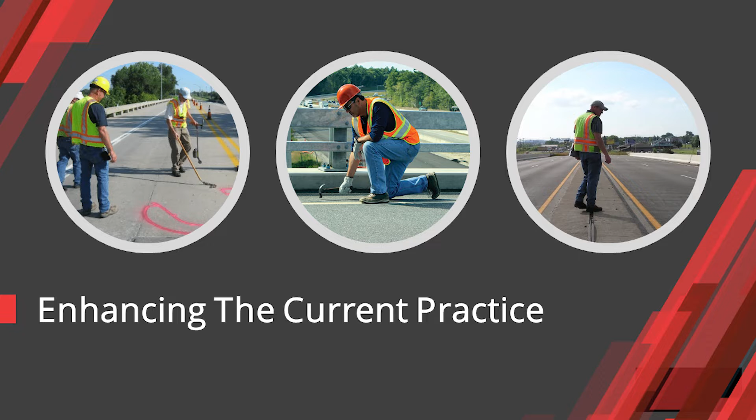So quickly going through enhancing the current practice of, for example, visual inspection, this is done through this truck that many of you saw parked outside. This is what we've called our high-speed inspection truck. Many of you have seen it, and we have gone over the equipment, so I'm going to make the rest of the presentation more about the results than the equipment. But to quickly go over what we have on board this high-speed inspection truck to facilitate the visual inspection, we are capable of conducting the inspections and data collections at speeds of 40 miles per hour or higher if need be.

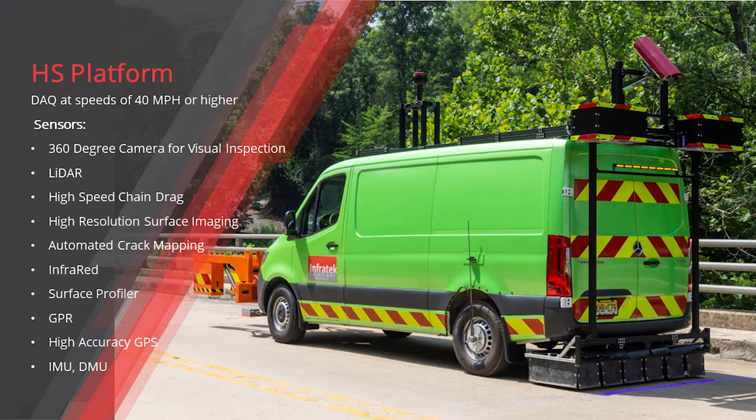We have a 360-degree camera that you see on top of the truck, and since this picture was taken, we moved that camera toward the front of the vehicle, and it gives the inspectors this immersive view of the structure as the inspector is walking the structure and looking around. We've got LiDAR for measurements, high-speed chain drag that we're going to talk about, surface imaging and crack mapping, infrared for thermography if there are favorable weather conditions, surface profilers, GPR, and some other tools to make sure that we know the local coordinate system of the bridge and where the data is being collected.

So if you want to see a quick sample of how the data is collected, it is collected like this, and we are done. This is a local bridge in north New Jersey. The bridge is around 150 feet long and 32 feet wide. But as you saw, that is all it took for us to collect the data that we required for the purpose of our visual inspection. And that enables the inspectors to start their inspection job from the safety and comfort of their computer. Now, this is a small bridge. Imagine the possibilities for a lot bigger bridges, interstate bridges, and the like.

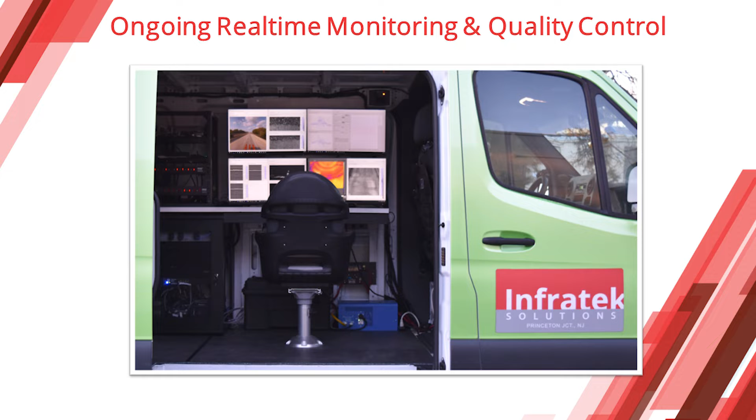So as we discussed, real-time monitoring and quality control is very important, because whatever we collect and give to the inspector, we want to make sure it is in the best condition it can be. So we have software quality control in place that does everything in real time, and we have operators who, while the data is being collected, are sitting there monitoring the data coming in, so that if we see problems, we can take care of them in the field, or if that is not possible, we will mark the data so that it wouldn't pollute the final results.

Now, when it comes to the delivery, we have an online portal that the users would be able to customize to their own liking. But we are going to go over some of the results that are mostly videos. We were talking about giving the inspectors the option and capability to walk the bridge.

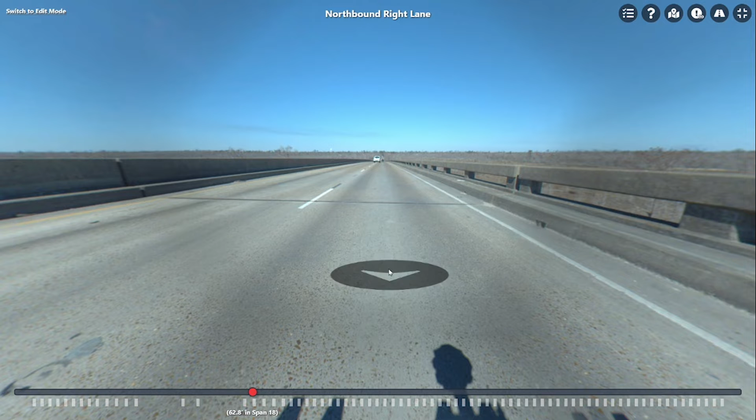This is a bridge actually in Louisiana. It is a 1.2 mile long bridge, 4-lane, that we did for their complex bridge design team. One of the functionalities they were really looking for was, because they couldn't really close the bridge to traffic because of so many conditions and schools being nearby and things like that, they wanted to have this ability to walk around the bridge and look at things. So literally we facilitated that for them.

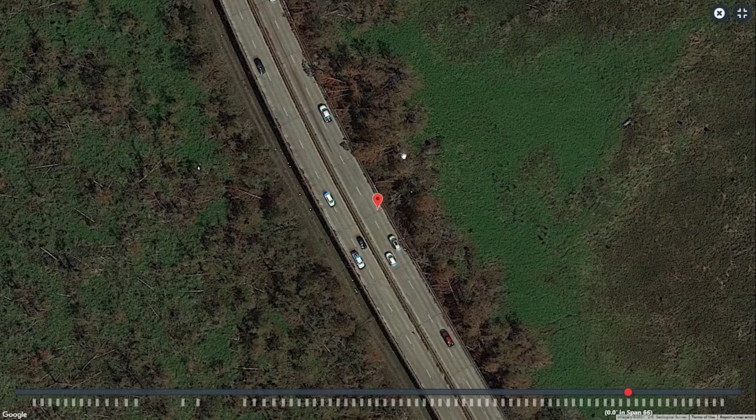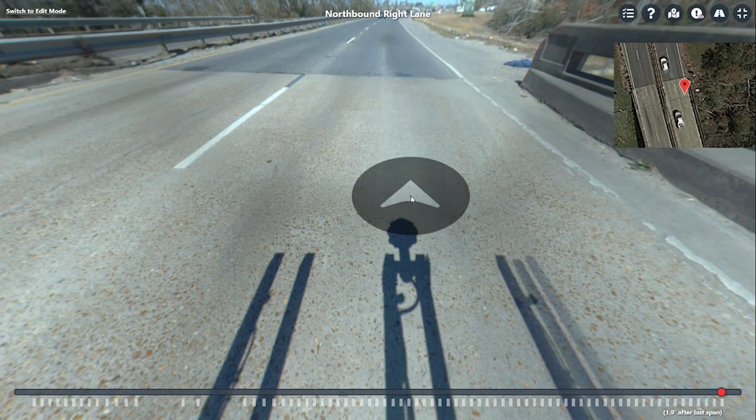Now we can do our visual inspection through many of these sensors, and then with some other tools, for example, integrating with Google Maps, we would be able to give you some other view into the surrounding and other things that inspectors use. Google Satellite is one of the things that we use quite often, and that is pretty much integrated into the system too. You wouldn't need to switch between this system and Google Maps to, for example, check out the surrounding.

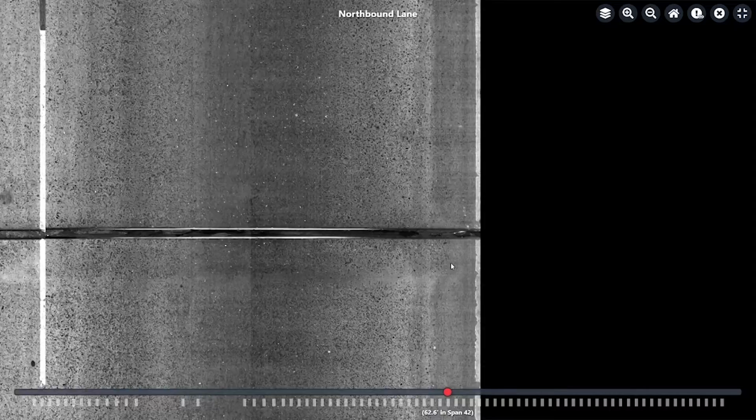But the other thing that we've done is, by this system, we are giving the inspectors what I would like to call Superman vision as well, because not only would the inspectors be able to look around, which sometimes wasn't really possible, but we would be able to help them move quickly from location to location. For example, right now, as you can see, we are moving from span to span, and we are looking down. But at the same time, if you would like to zoom in a little bit more, to use something like a magnifying glass to check that, that would be possible right from the inspection portal as well.

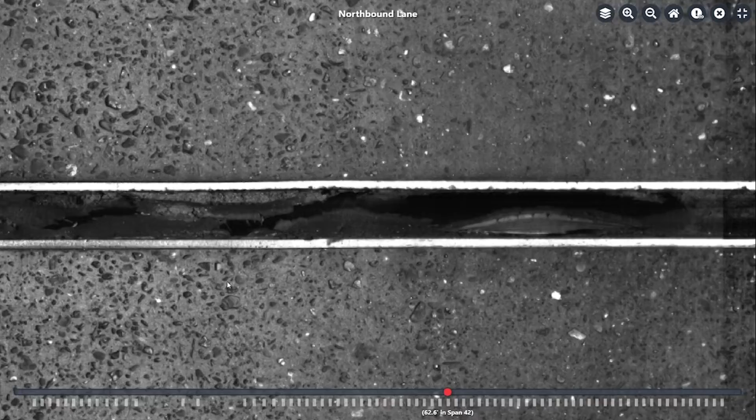Or even if you would like to see subsurface information, that is why I would like to call it Superman vision, you would be able to go to the subsurface and see what is happening below the surface as well. This was, for example, one example of the joint inspection, that as you saw, we would be able to zoom really into the joint and check out, for example, the integrity of the joint seal.

We talked about crack mapping. So we have high resolution cameras taking pictures from the surface, and then we have trained the AI to detect the cracks. And based on the criteria and the width categories that the user defines, the system paints over those cracks for you, calculates the total length of those cracks on the bridge, and then reports everything back to you. We've got density maps based on those calculations.

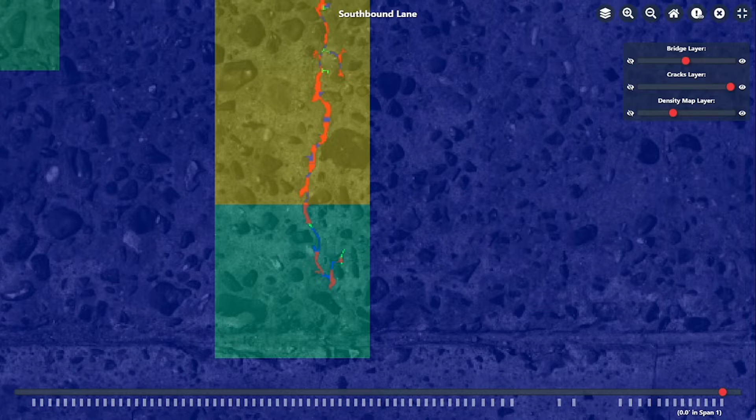You can turn it on and off, and then see where you have, for example, higher density of the cracks, lower density of the cracks, and remember that we've got chain drag data, so you will be able to see, where you see a lot of cracking, what is going on below it. Are we having, for example, shallow delamination in that area or not? Again, that is totally possible, and that is something that I would say contributes to that Superman vision that we talked about.

You want to have a high view into your bridge deck and see what the status of the cracking is. So you're looking at the density map, and then you see a red spot. That means an area with a lot of cracks, or bigger cracks, compared to all other areas on your bridge. And that could be literally your focus area for something really quick that you want to do with that bridge. Again, that is all possible from here.

But the other thing that we made available is the power of customization. Because we know that bridge to bridge, inspector to inspector, program to program, there are so many differences. Again, Ben, back to your question regarding time pressure, if there are things that we will be able to implement here based on a specific owner of, for example, different districts, we would be able to implement them here as well, with the idea of increasing the efficiency of the work and removing that time pressure that we're talking about.

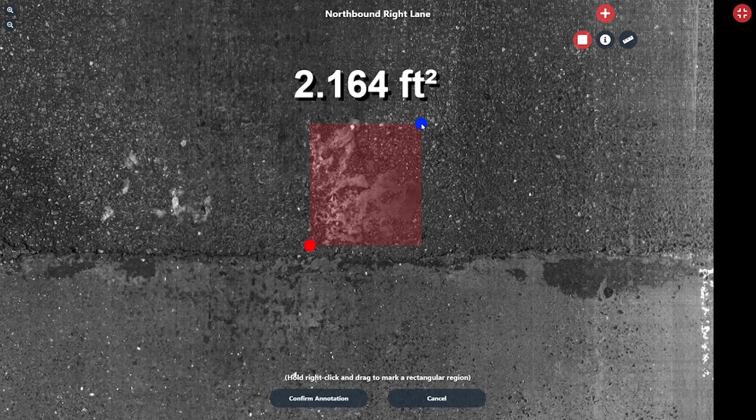We want to do measurements. That is something that we all would love to do in the field, but most of the time it is not possible. But it is pretty easily done from the system. If it's linear measurement, if it's the perimeter of a feature, if it is the square footage of a feature, those can all be done straight from the inspection portal. Now, when it comes to seeing something and marking it, again, we are training another AI engine to start detecting features.

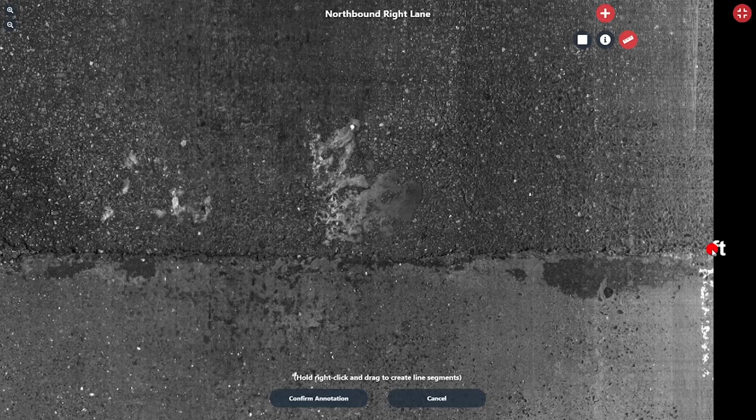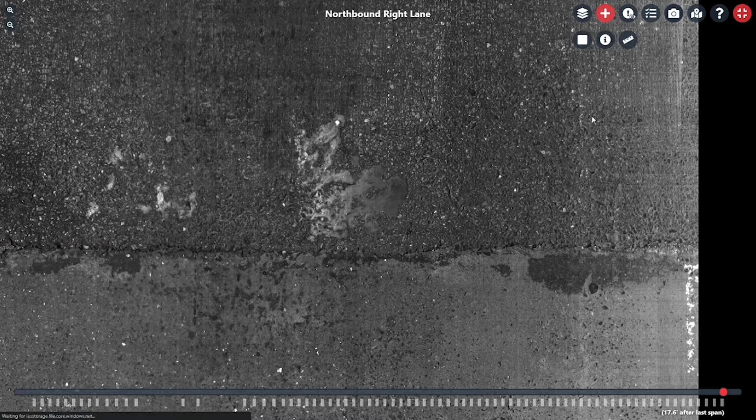Right now, that engine is trained for cracks, so if we see cracks anywhere, we would be able to actually do it. But now we've started to train that engine for spalls as well. So when the inspection work begins, for example by state inspectors, when the system is activated, it comes with some, I would say, picked problems.

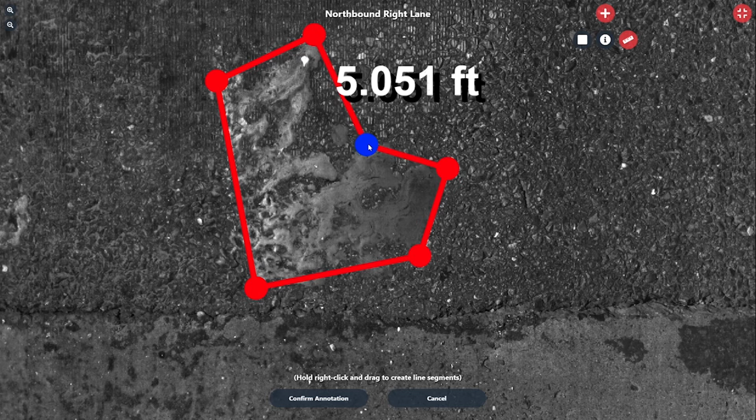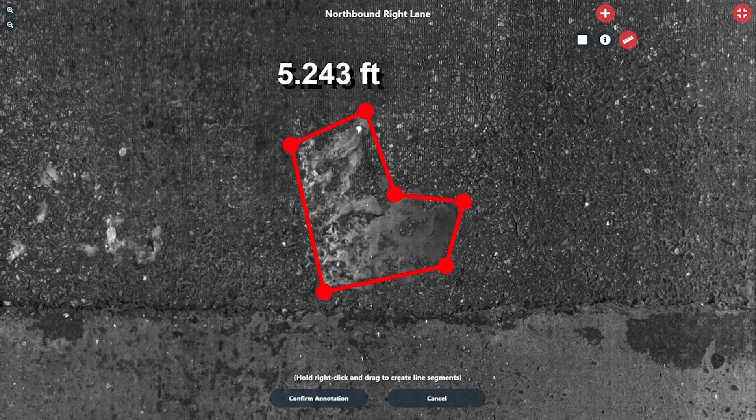For example, right now we are working on spalls, so the system would find the spalls and mark them for you. And then it would automatically go ahead and, for example, fill out the NBE or NBI form based on the problem that it found. So we already know the location of the defect. The system already knows it, so it's going to jot down the location for you. It's going to take a picture and automatically attach it for you.

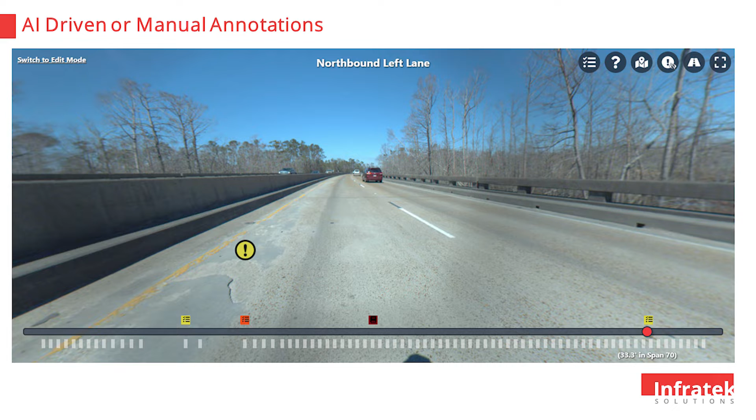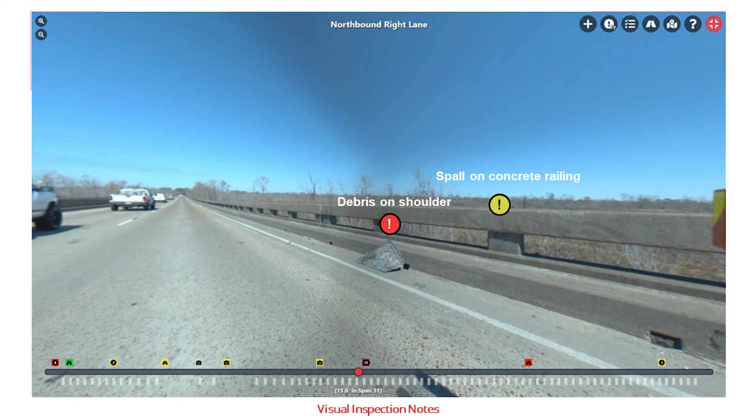Some other screenshots from the work that we did for Louisiana DOT. And this is a quick look into how the process is done if an inspector wants to do it manually. So you see the problem, you would like to annotate it and log it for use or for being part of your inspection report.

The system is going to ask you whether it is something personal or you want to formalize it and assign, in this case, an element detail to it. And then the user goes ahead and chooses the element level detail. And based on where the location of the defect is, the form is going to change dynamically. You give the information, and then it logs it for you with everything you provide to the system.

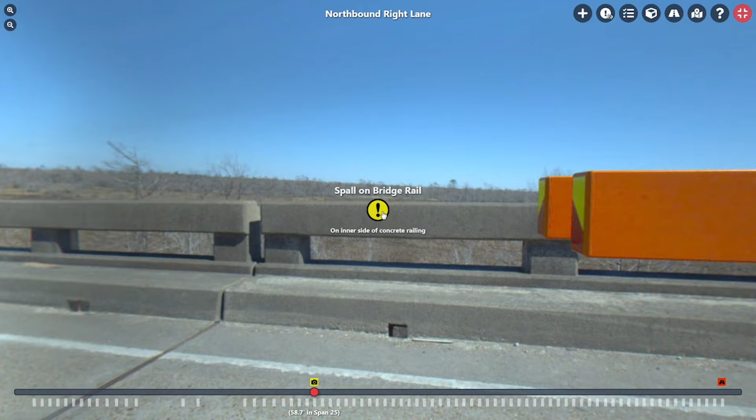Now, there is this connection between the forms as well as the defects too. You see the published form. You see, for example, there is this area of spalling on the deck with condition state 2. You want to check it out right there from the form. You click on that area, it takes you back to where the picture was taken from. Or if you see an annotated location showing up on your inspection form, you click on it and it takes you to where the form is.

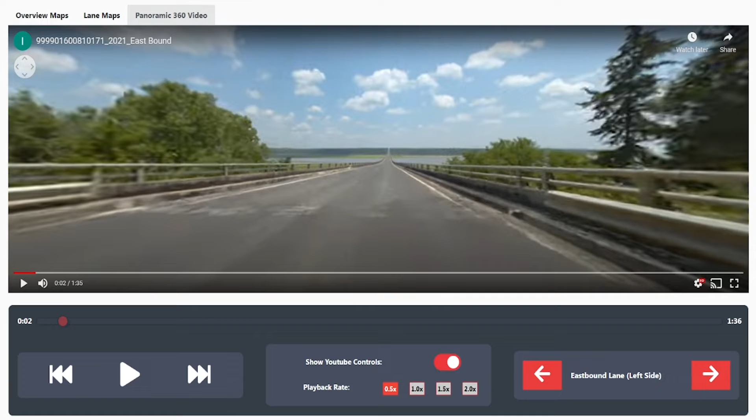And with the forms, we are currently streamlining the process so that you can literally file and transmit the inspection file to FHWA as well. And another feature that many of our users and owners we are working with asked for, and we added to the portal, is to just see a video as if we were driving the deck. So we added that as well for use by inspectors.

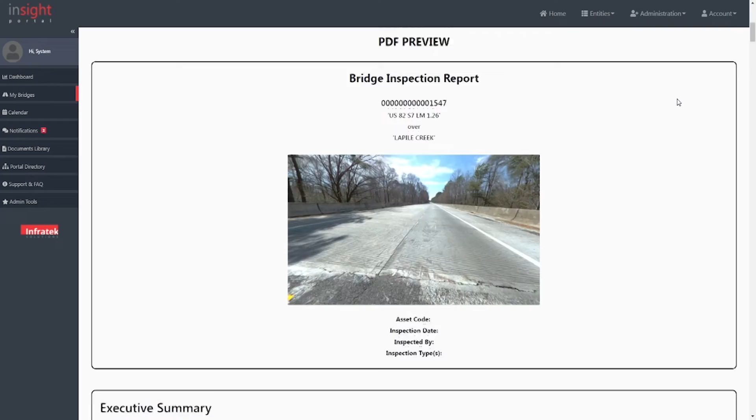This is a dynamic form builder that we already have there. So based on the different type of inspection, you can dynamically add in what you will need. If the system has already picked them, it's going to be pre-populated. If you pick them using the system, it's going to be automatically populated for you as well. As we just discussed, it already has much of the information to log the problem for you. We already covered the bidirectional connection. It is editable and collaborative. We have built in task assignment, management of tasks, and communication between different users of the form as well.

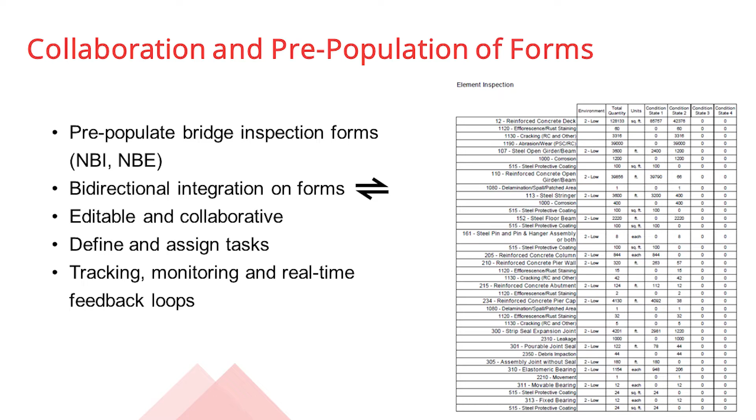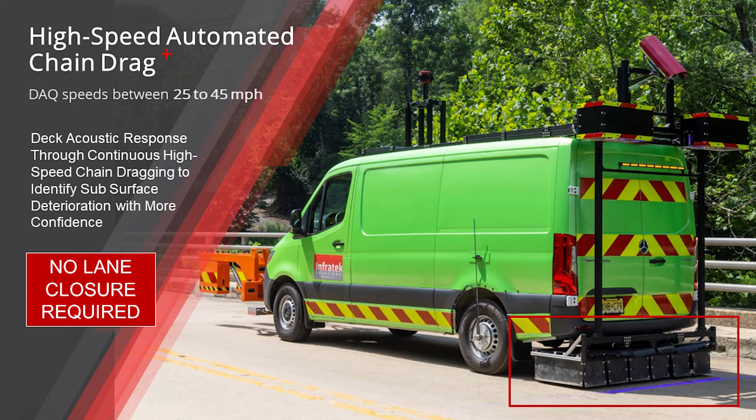Now going into chain drag, it is this part of the system that is within the footprint of the vehicle. It is here. Again, we can go at any speed. We can get started from even walking speed, but at 40, 45 miles per hour, the system works very well. The good thing about this system is that we wouldn't need any kind of lane closure, and the results are a lot better than the chain drag that we all do, because most of the time we are relying on our ears, where a lot of background noise is going to prevent us from hearing the defect.

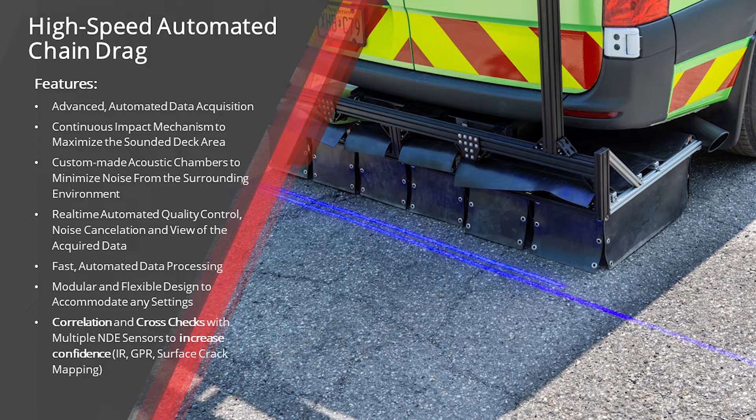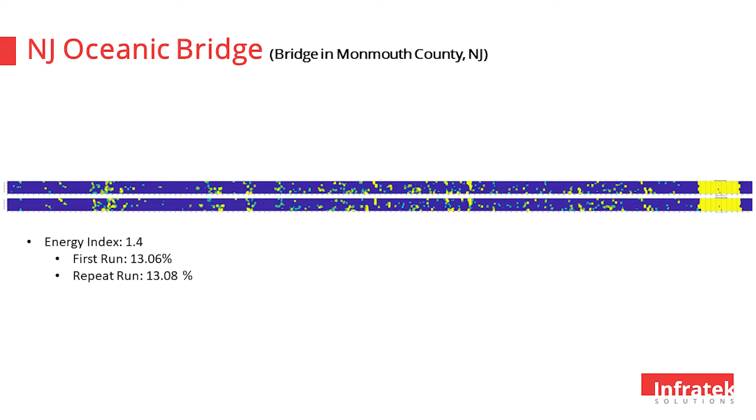It is highly repeatable, so this is another project for a county in New Jersey. As you can see, it was a movable bridge. We did chain dragging at 2 different times, 4 weeks apart. Top and bottom are 2 different results from those 2 different days. The patterns are the same, and the delaminated area for one is 13.06%, for the other one is 13.08%.

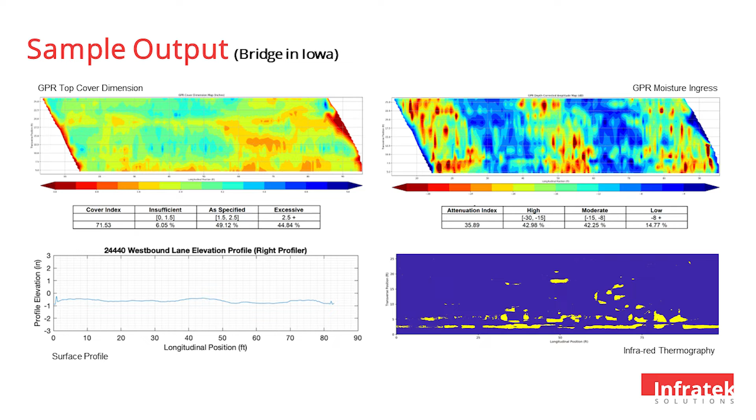And some of the other data coming out of the high-speed system actually give that Superman vision to the inspector to see what is really going on below the surface. Now, if we go into the area of multifaceted NDE, or going back to the earlier conversation of doing our high-speed test and then doing more in-depth test, we have another tool in the toolbox that we call our high-definition system that, again, many of you saw parked outside.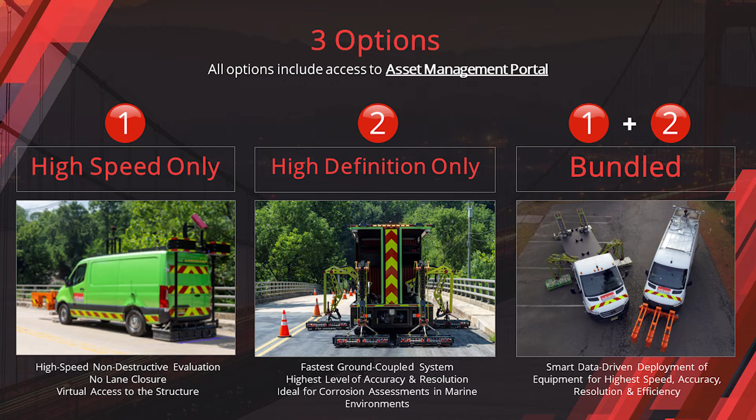So here is where that notion of medical practice that we talked about comes in, because the smart, most optimized way of using this equipment is to deploy the high speed, which is, again, no lane closure required, and take the MRI machine on 4 wheels only to where we actually need it to be. This system, using the sensors that it has and the way that we have automated it, is really the fastest ground coupled system. So although we're going to require lane closure to deploy this system, we know that it is optimized and it is the fastest system out there that can do ground coupling for you.

But if owners want, the same way that we've been seeing for the past few years, based on the need, we either just deploy the high speed, or just deploy the high definition, and in some cases we bundle the two. But all of them come with the inspection and asset management portal that you saw.

So on each one of these sensor trays down here, we have impact echo that finds shallow or deep delamination for us. We've got ultrasonic surface wave that finds and reports back to us the estimated modulus of elasticity of concrete. We've got electrical resistivity that gives us a very good estimation of the corrosive environment at the rebar level. And we've got ground coupled GPRs that give us the top cover dimension as well as moisture ingress.

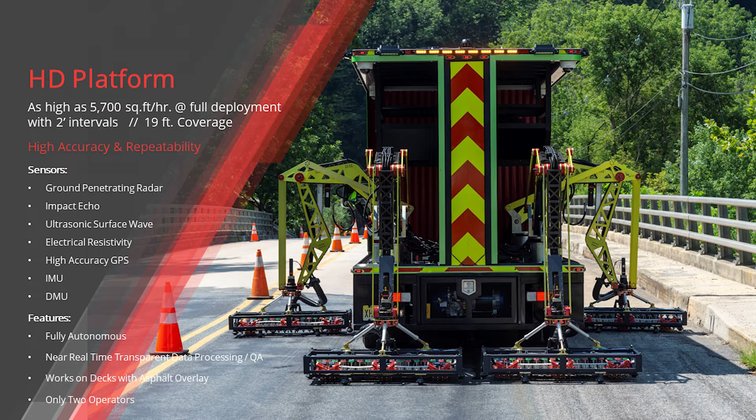Now, because the data collection with this truck is stop and go, our speed is around 5,700 square feet per hour at full deployment. And full deployment means we have all of the arms deployed from this area to this area. We are looking at around 19 feet. So this system is ideal for when states are, for example, letting out a contract. They want detailed quantity estimates. They want to know the location of all the delaminations so that the contract can go out nice and easily. And if you look at this video, this is how the data is collected.

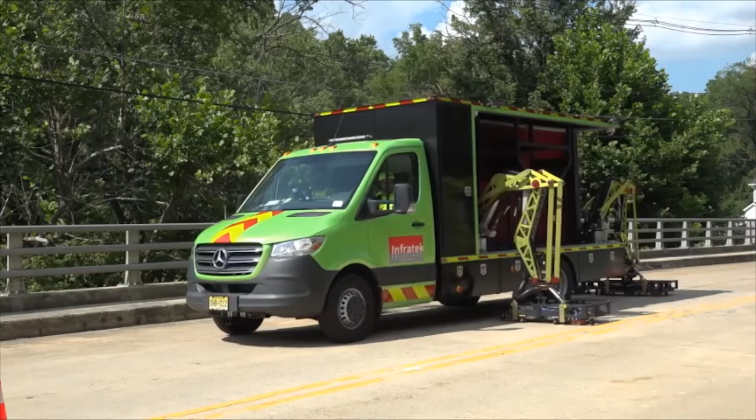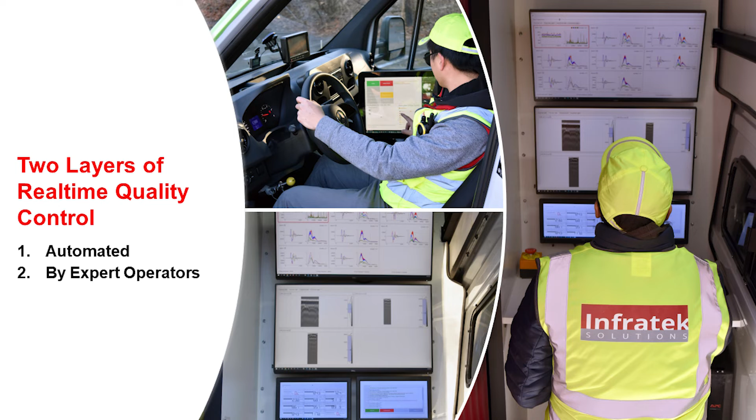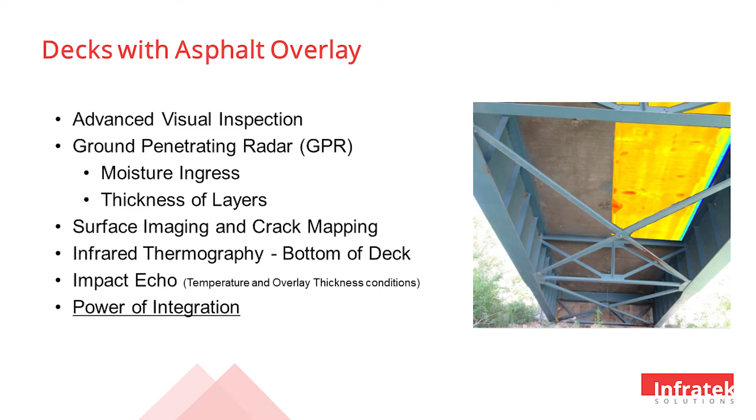I want to get to the case studies as well. There are 2 layers of quality control, just like the high-speed system, automated and by operator. I've been asked so many times during our conference if there are any high-speed solutions for asphalt-covered bridges, and the answer is asphalt is going to make accessing the bridge deck difficult, but it is not the end of the story. We always have the power of integration. We can deploy different sensors that would give us different views into the structure.

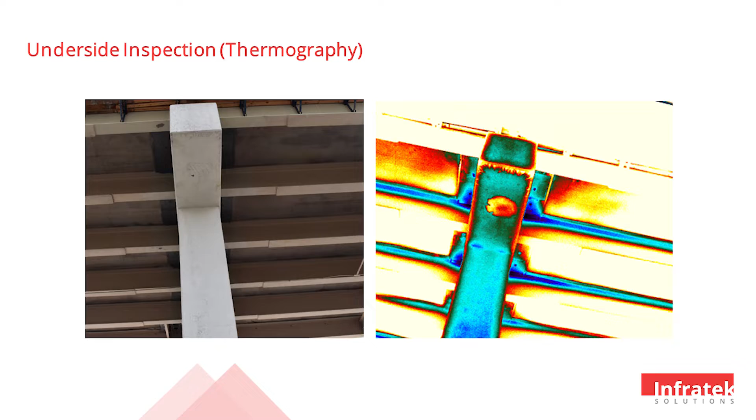We can start looking at the bridge from the underside if access is possible, and putting all of those data points together, we would still be able to make some good determinations about asphalt-covered bridges as well. This is a sample of imaging from the underside, where you see this nice delamination popping up when you are doing infrared thermography compared to the RGB image. Again, drones, we already talked about them. We've done that for a few states as part of making a holistic inspection of the structure.

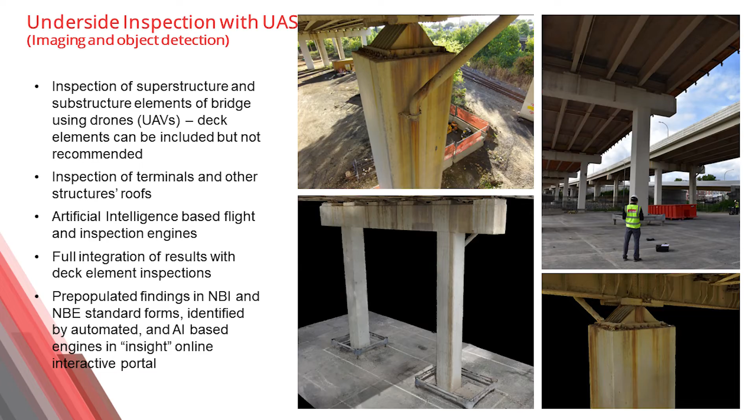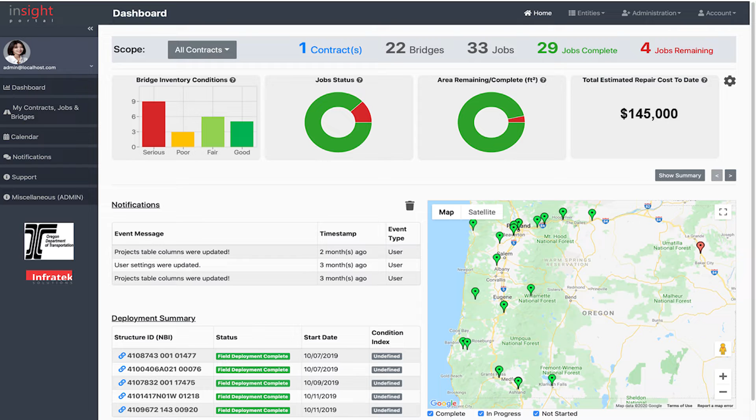Delivery and reporting, you already saw some screenshots, but as we discussed, all the dashboards and literally everything in that inspection portal is customizable to the needs of the inspectors, and you can print out your own in-depth PDF report from the portal as well.

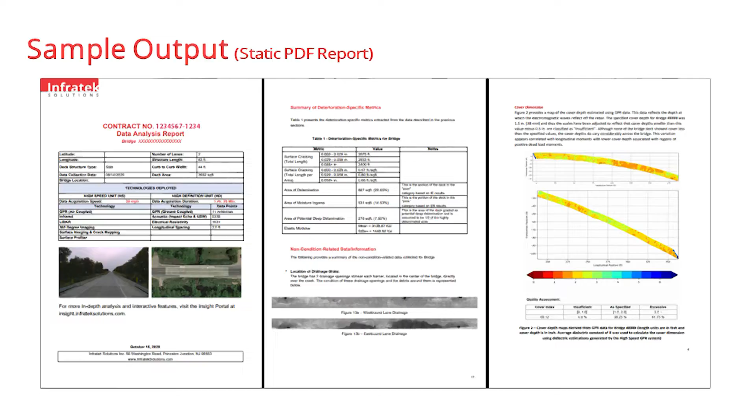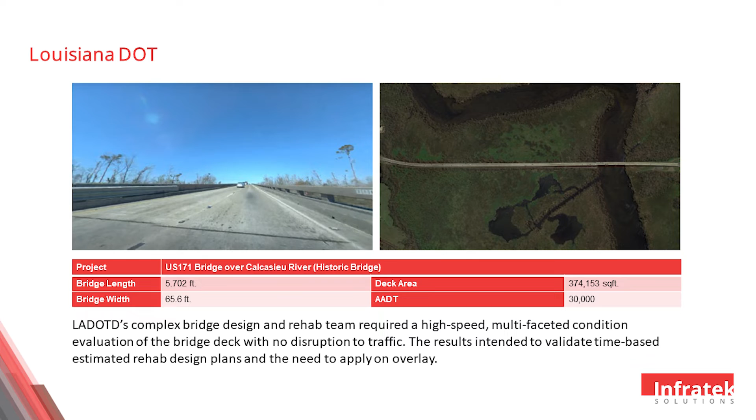So, four quick slides on some of the work and how different states actually used this system. This is, for example, the Louisiana DOT, who worked on the historic bridge that we talked about. They wanted several things out of the system. First off, the design folks wanted to actually be able to walk the bridge, so that is what we gave them.

But at the same time, because they couldn't close this bridge, they didn't have any chain drag data. So all of the rehab planning for this deck, as well as the application of overlay they were thinking about, was being done by time-based models and gut feel of the folks in the design team. But we managed to finish this whole bridge in less than 2 hours and get back to them with all of the results in a week.

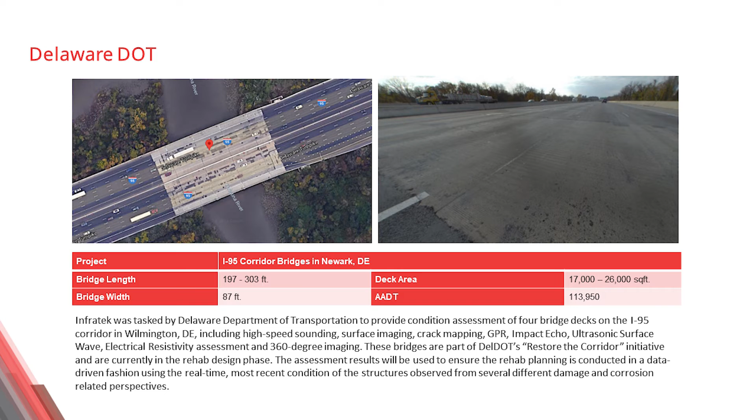Four bridges that we did very recently for Delaware DOT as part of the Restore the Corridor program that they have going on with these I-95 bridges. Because of the scope of the work and criticality of the situation, we wanted to make sure that we go into the design and the contract knowing exactly how much damage we are looking at and where the damages are located. These bridges have gone through several rounds of widening over the past 50, 60 years.

So we wanted to know the condition of each round of widening that has happened on these decks as well, and this is where we deployed our high-definition system to get the asset owner, DelDOT, the exact information they would require to put together their design plans.

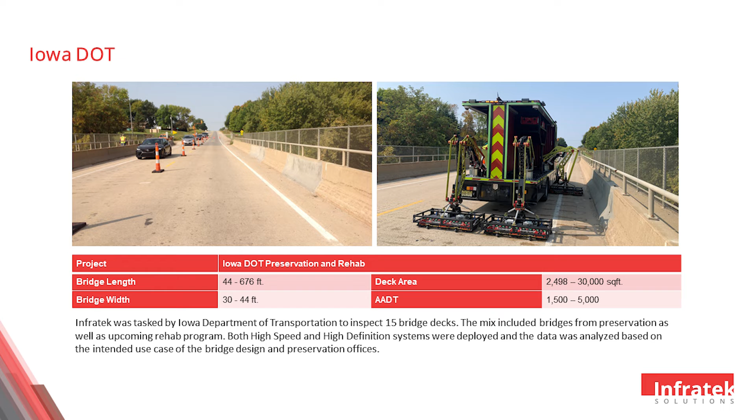Iowa DOT used both the high-speed and high-definition systems for their preservation and rehab works on, if I remember correctly, I have it here, 15 bridges. We had bridges with deck area from around 2,400 all the way to 30,000. There was a mix of 7 bridges coming up in their biannual rehab program, and another 7 bridges where they wanted to do preservation action.

And the last case study is from Oregon DOT. For the folks going to the Boise, Idaho meeting, we have a session dedicated to review of these results with the folks from ODOT. Andrew Blower, who at the time of the work was in charge of preservation, is going to be presenting with me. We are working on the slides, and we're going to go over all of the results together.

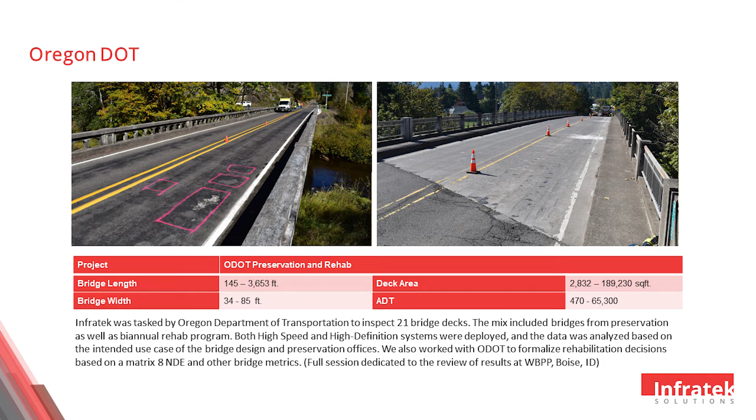We had around 21 bridges, deck area from 2,800 all the way to 189,000. And we again deployed both systems, high speed and high definition. They had planned both preservation work and rehabilitation work on these bridges. With all of the data and reports we generated, we produced enough information that designers could actually use.

And the last slide I have here: we were notified on Wednesday that a proposal we put forward to use field studies to establish NDE protocols for use in early-stage bridge deck preservation strategies received a lot of interest from the NCHRP IDEA grant panel, and we will most likely be awarded this grant in the next month or so. There are some comments we addressed for them, but they said most probably we're going to have that grant. The idea is we come up with protocols that are driven by data, driven by NDE metrics, to find preservation triggers.

For this, we have support and some bridges given to us by Delaware DOT, VTrans and Iowa, but we are still looking for other participants, asset owners and bridge owners, especially in our area. We are a Pennsylvania and New Jersey based company. So if you would like to participate in this study and give us some bridges to do data collection, then we report back the results to you and include them in this study, which is sponsored by NCHRP, we would like to talk to you and go over the scope of data collection.